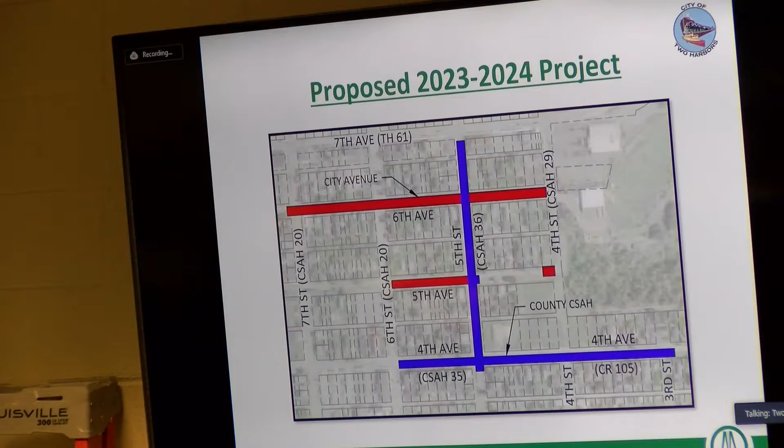As I mentioned, we've done a preliminary investigation so far. We've identified the proposed work and worked out how we're going to approach it. We haven't dotted every I and crossed every T yet—there's still a lot of work to be done in final design. But if the project proceeds, final design will be done this fall, and construction would be targeted to begin roughly late May or early June of next year.

Before we get to that point, we'd have additional public meetings. Tonight is to talk about what we're going to do, what it's going to cost, and the estimated assessments. Before construction starts, we'd have a more dedicated meeting about what you're going to see during construction—how your mail will be handled, how you can access the streets, whether your water will be shut off, and whether your sewer will be interrupted. So we'd invite you back again in the spring before work starts to go over all of that information.

One other important thing to note right now: the city of Two Harbors is not committed to this project at this point. All they've committed to is the preliminary design and the feasibility report that's been prepared. So if they feel it's not financially feasible, or not feasible for any other reason, or they just don't want to do it, they can pull the plug after tonight's public hearing and the project stops.

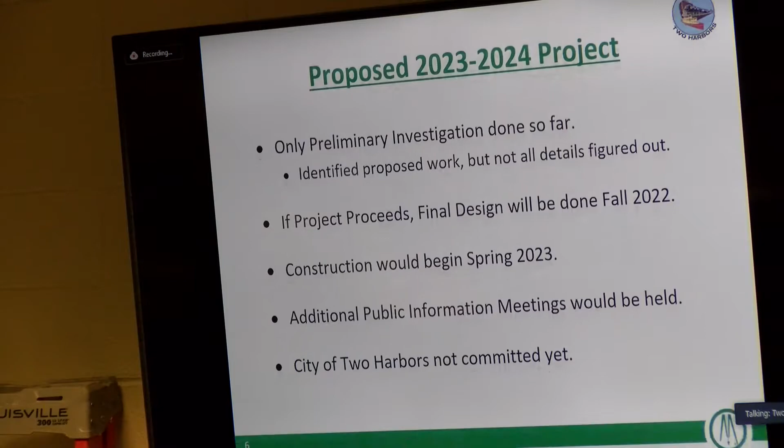Okay, so the feasibility report—as I mentioned, we have a report. This is a copy of last year's report; I don't have the new ones bound yet, so I'm just using this one as an example. The new one is very similar, about 120 pages long, and about half of that is figures, costs, tables, and that kind of stuff. But what it defines is the existing conditions out there now, the proposed improvements we want to do, what it's going to cost, and how we're going to finance those costs.

The City Council officially ordered the report, which is required by state law, on April 25th, and they officially accepted the report on September 12th. When they accepted the report, that's when they told the city clerk to schedule the public hearing, place the advertisement in the newspaper, and make the mailing to the project area.

Copies of this report will be available on the city's website, along with the presentation from tonight's meeting, once we get done with the meeting—we can get it posted probably within the next week or so. They'll also be available here in hard copy at City Hall if anybody wants to come in and look at the information.

So, proposed improvements—we won't spend a lot of time on this, but this just shows what's under a typical city street. You usually have sanitary sewer, which takes the wastewater from things like sinks, toilets, and laundry tubs, collects that, and routes it to the sanitary sewer treatment facility before it gets treated and discharged to Lake Superior. You also usually have a storm sewer, a separate sewer that handles surface water—from rain or water running down the street—goes into catch basins usually located on the edges of the street, collects that water, routes it through a separate sewer, and that usually gets routed to the lake as well.

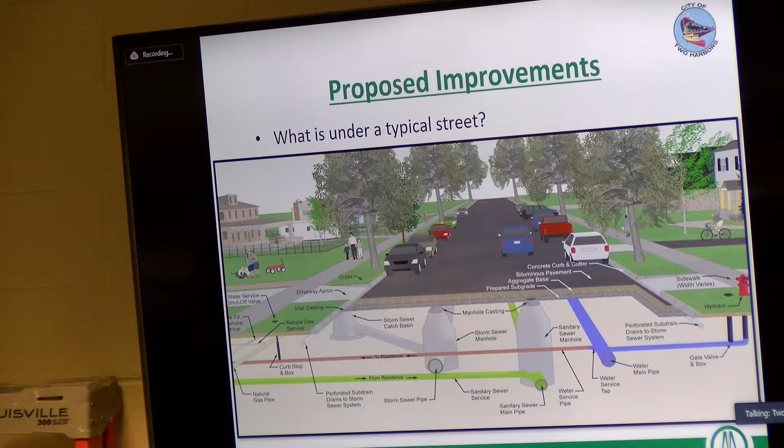So we'll run through this quickly, step by step, of what we're planning to do. For the water system, we would propose to completely replace all of the water lines under the streets now. We'd also replace all of the individual service lines from the main out to and including the shutoffs. So you'd get new mains, new individual service lines out to the shutoffs, and a new shutoff. Then on the back side of the shutoff, we reconnect it to the service line that extends up into the house.

In order to do that, we'd have to set up a temporary water system, because it's going to take probably a month for each block to remove the old water main, get the new water main in, and make sure it's pressure tested. In the meantime, we'd set up a temporary water system to make sure everyone stays in water service while we're building the new system. So it's kind of a 2-step process: set the temporary system up so we can take the old one out of service, build the new system, get it tested, and then switch over so you're on the new system.

For sanitary sewer, we'd propose to completely replace all of the mains and manholes as well. We'd also replace the individual service lines that run from the main up to the houses. We wouldn't go all the way to the house, only about as far as the water services, because a lot of times they're side by side serving the house—the water service and the sewer service. So if we go out to where the property line is, about 30 or 35 feet, and replace that water line and water service, we'll replace the sewer service out to that same location.

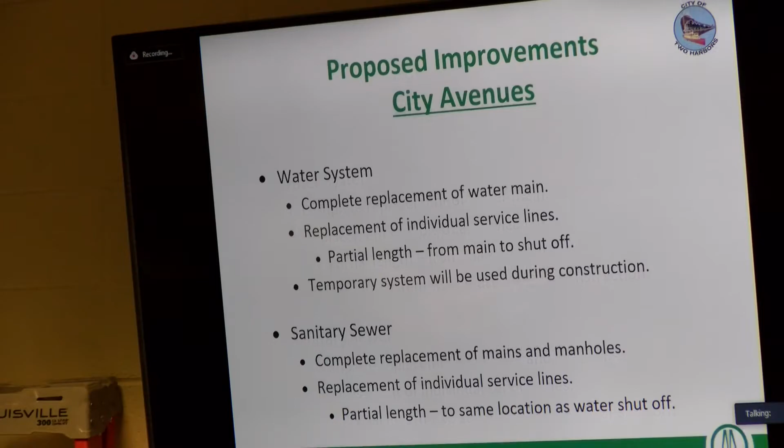Storm sewer—there's not that much in this neighborhood, but what is there will need to be replaced so it fits the new street. If we're adjusting the street width a little bit or adjusting the elevations, we've got to make sure the new storm sewer can fit that.

We also, in order to protect the investment we're making in the streets, will install drain tiles—subsurface drain lines that collect any groundwater and make sure we get it drained away from our streets, because water is one of the natural enemies of streets and will destroy a street if you let it undermine it over time. So we'll set up drain tiles wherever we can physically make them work with the grades, and install that as part of the project.

For sidewalks, we would completely replace all the sidewalks that are out there now, so you'd get brand new sidewalks running parallel to all the avenues.

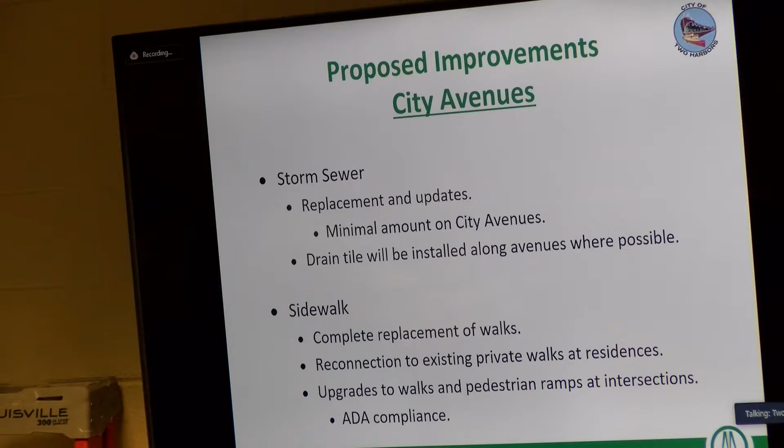Sometimes there's some steps too that we may have to replace, but all of that would be worked into the final design, and all that's estimated right now and projected in our feasibility report.

And then the street itself, we would completely reconstruct. Obviously, those sewers and waters are usually about 8 to 10 feet deep, so we're going to have the whole street dug up to a depth of about 8 or 10 feet. So when we build that back up, once we get the utilities done, we'll rebuild the whole structural section of the street. The street has strength to it, it has structure. It usually has pavement on top, a gravel layer in the middle, a sand layer down below, and below that sand layer you have a fabric to keep the soils down below separated from your engineered materials for the street.

So we would completely rebuild that whole structural section to make sure the streets have brand new 100% strength when we're done. As far as the particulars, Fifth Avenue exists right now at 32 feet wide from curb to curb, and we would propose to rebuild it at that same width. That will match the blocks of Fifth Avenue that we did in last year's project, so we'll be consistent with the width of Fifth Avenue in this project.

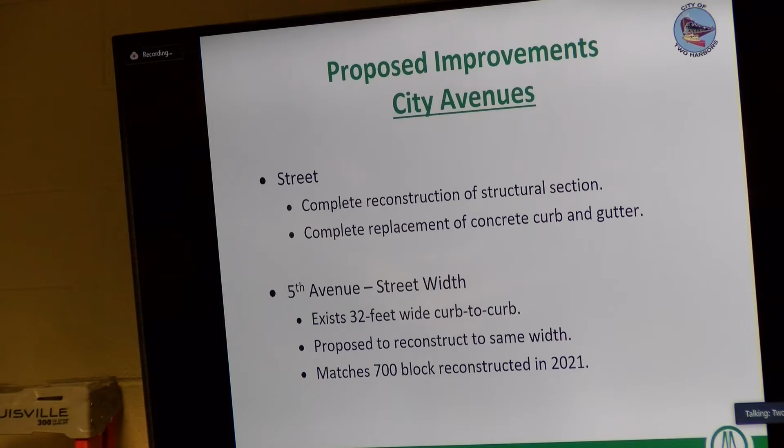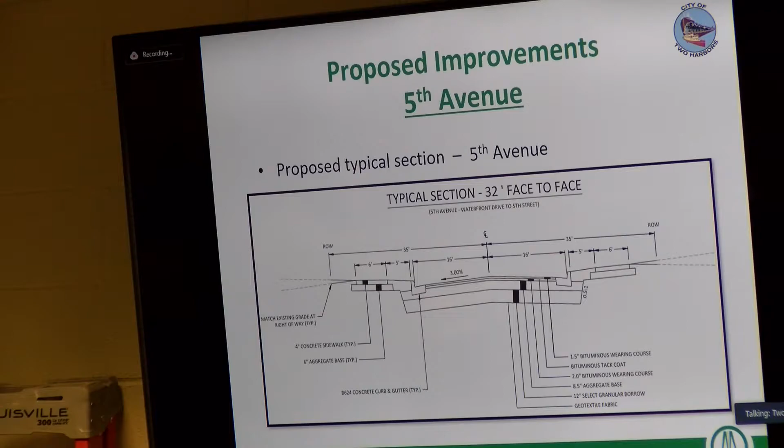This is what an engineer calls a cross-section, as if we took a knife and sliced through the street so you can see it from the end. You can't read this here, it's too small on my screen, but it typically shows that we're building the street 16 feet out from the center line each way, so 32 feet total. We'd have sidewalks on each side. Typical sidewalk width along Fifth Avenue is 6 feet wide, and there'd be a grass boulevard of about 5 feet between the curb and the sidewalk for this block of Fifth Avenue.

This figure shows that one little red dot I mentioned at the very east end of Fifth Avenue, where we want to replace that hydrant, or add a hydrant that doesn't exist currently. This just shows the limits of the work we do there.

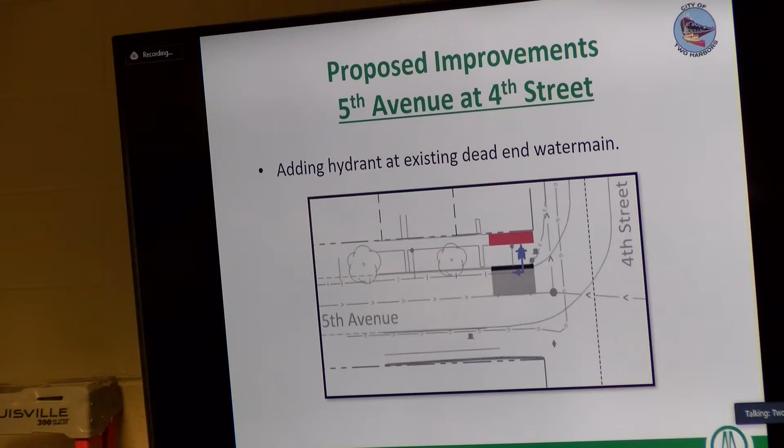And 6th Avenue, a little bit of information on that. The existing 6th Avenue, because we've got these 3 blocks - the 400 block, the 500 block, and the 600 block - each one is a little bit different width right now. The 600 block has curbs, then in the 500 and 400 blocks they don't have curbs, so the edges and the width vary a little bit. So we would propose that all of those blocks be standardized and built at 28 feet from curb to curb, with curb on both sides. That'll match the 2 blocks we just did in last year's project, so when we get done, from 4th Street all the way to the west end, it would be consistent with 6th Avenue all the way down.

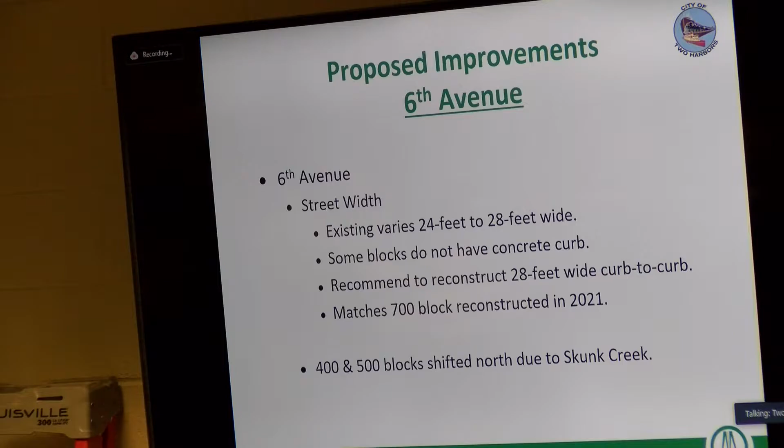For the 400 and 500 blocks, that's where the creek runs under the tunnel on the west side of town, down the alley. Then it shifts, and when you get to the segment from 6th Street down to 4th Street, it runs right along the south side of the road. Because of that, we would shift those 2 blocks of 6th Avenue north 5 feet to give a little more buffer space next to the creek. But if you go out there and look at it now, the existing road already shifts - when you come from west to east and cross 6th Street, 6th Avenue does shift a little bit north. So we're essentially maintaining that shift that's there now, but we formalize it with our design, primarily due to Skunk Creek.

Then we get to the 400 and 500 blocks. Here we're showing the road shifting 5 feet north to give more clearance to Skunk Creek, and we're only showing sidewalk on the north side, since that's where the homes are and where the majority of walkers will be. There would not be a sidewalk on the south side of 6th Avenue for those two blocks - just the road and a curb, sloping down into the creek. But there would be a sidewalk on the north side, with a grass boulevard between the curb and the sidewalk.

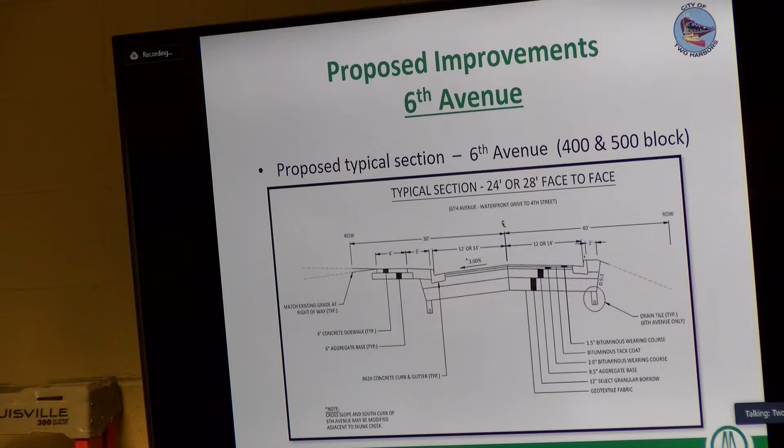That covers the basic improvements we want to do for 5th Avenue and 6th Avenue. We did look at a couple of options identified during our preliminary layouts. One is that there is currently no water main on 4th Street. The water main that comes on 6th Avenue just dead ends with a hydrant, and the water main on 5th Avenue dead ends with no hydrant.

So we talked about putting a water main north-south on 4th Street and tying 5th Avenue into 6th Avenue. The alley behind the credit union has a water main, so we could connect into that and make it all looped. Which is fine, we can physically do it, but it's not the cheapest improvement to do.

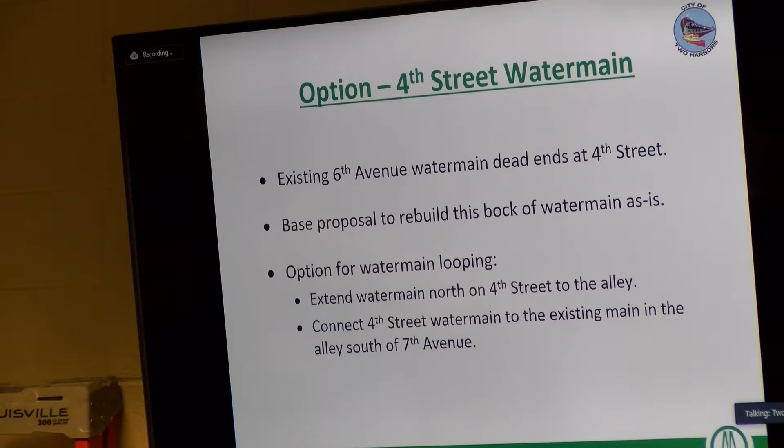In talking with the county, they're looking at maybe rebuilding 4th Street at some point, maybe 5 to 10 years out. So we concluded it makes more sense to do that water main when the county rebuilds 4th Street, as part of a larger overall project rather than fixing this one issue now. It'll be more cost effective and coordinated done in the future. So that's in the report because we identified it, but we're recommending to the council that we not add it to the project now. This figure shows how we would have done it if we'd kept it in the project.

One other option at the same location on 4th Street: there's the signal up at Highway 61, and the credit union on the west side, with a nice sidewalk coming down that west boulevard. It crosses the alley to the driveway of their parking lot, and then it just stops, leaving about 100 feet down to 6th Avenue with no sidewalk. When we rebuild 6th Avenue, we'll bring sidewalk all the way down to 4th Street, so that gap of 100 feet really sticks out.

So we looked at that, and it would be pretty easy to do since it's just a surface improvement - we don't have to dig up a lot to add a sidewalk. That can be done cost effectively. Even better for the city, since 4th Street is a county road, the county says they would probably be able to pay for the installation of that sidewalk. So we can identify it, have it done as part of the project, and the county would fund that segment if they're agreeable, which so far they've indicated they would be.

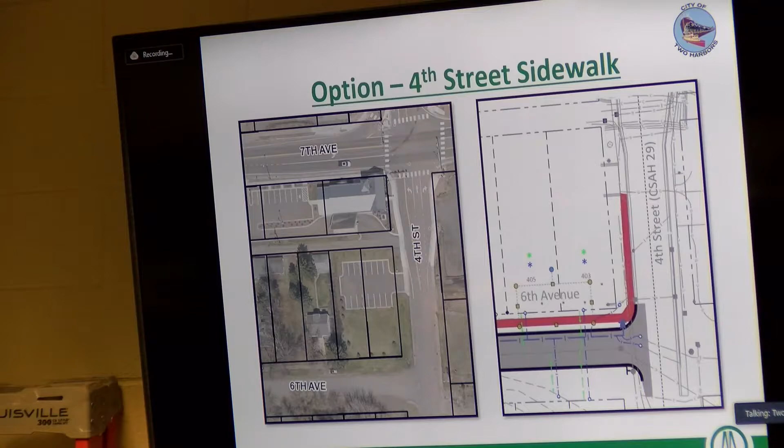Okay, so that's kind of an overview of everything the city's looked at on their blocks, the 4 blocks that are in the city's portion of the project. There's also 6 blocks in the county's portion, right? The 3 blocks on 5th Street and the 3 blocks on 4th Avenue. So here's an overview of what the county's going to do, and we have this documented in our report too, because we want to look at the whole project as an integrated whole.

So a couple of the highlights: there's a big box culvert on 6th Avenue that crosses under 5th Street. Skunk Creek is an open channel coming down the south side of 6th Avenue, and then it goes through essentially a tunnel, a box culvert. That's what it's called, a box culvert. So the county would replace their box culvert that exists under 5th Street, and they would pay for that 100%.

5th Street is their roadway. They'd also replace the storm sewer that goes from that big box culvert up to Highway 61. And then they would also extend new storm sewer from that box culvert all the way down to 4th Avenue, and they would put in new collection points at each of the intersections to help the water drain better. They also would drain tile their roadways too, to be consistent with the way we're drain tiling our roadways.

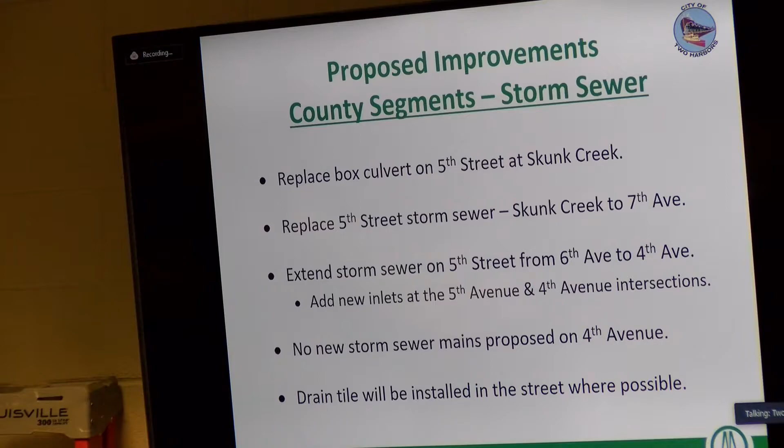Then as far as sidewalks on the county segments, right now sidewalk exists on both sides of 5th Street and both sides of 4th Avenue, and they would continue to have that in the proposed improvements. 5th Street would be a 6-foot sidewalk running north-south on both sides, immediately behind the back of curb. On 4th Avenue, they would have it on both sides, a 5-foot wide sidewalk, with a grass boulevard between the sidewalk and the curb.

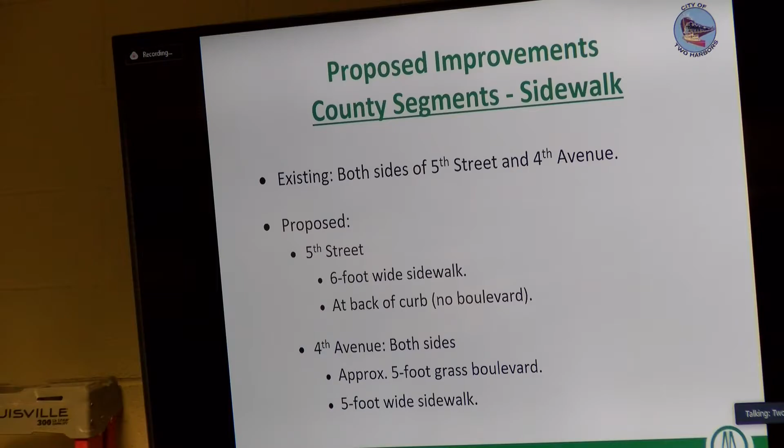I know this is a lot of information we're throwing at you, but I want to make sure again that you have as much information as possible. And it is all in the slides, so you can refer to those later at your leisure.

As far as the width of the streets themselves for the county, 5th Street would be designated to be 32 feet wide from curb to curb, with parking allowed on one side, the west side for southbound traffic. 4th Avenue would be 32 feet wide again, with one parking lane on the south side, for the eastbound traffic. That's the side where the library is, on the corner of 4th Avenue and 6th Street, so the parking would be on the library side, south side of 4th Avenue.

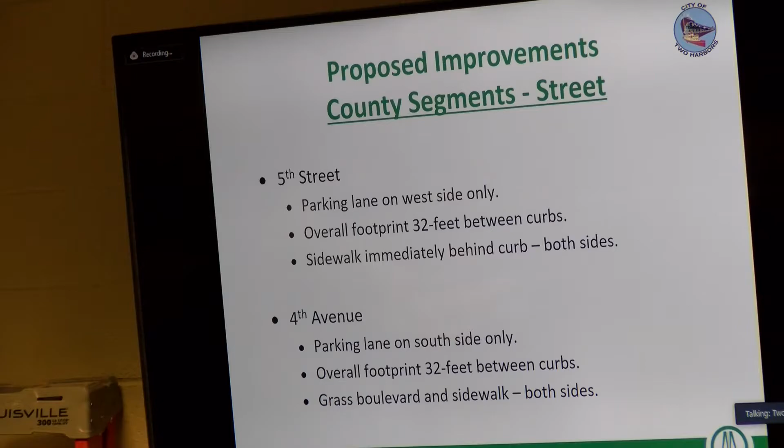So here's a couple of representations of how it would look. Fifth Street, you can see that car over on the far left, that's the parking lane, which would be coming southbound. And then there'd be one lane of traffic for each direction of traffic, and there'd be a sidewalk on both sides right behind the curbs.

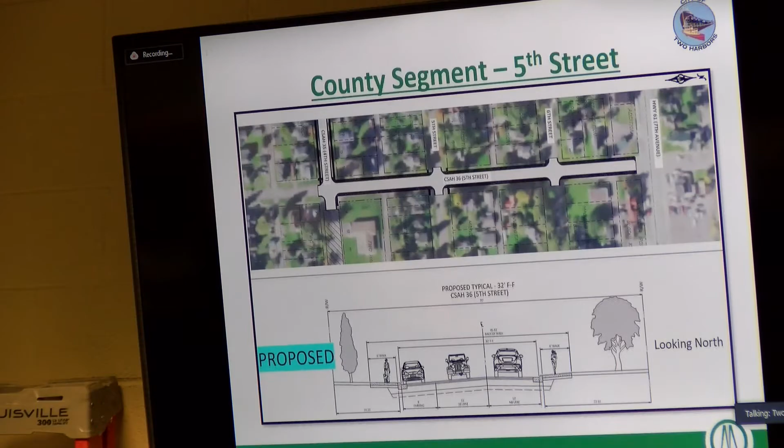4th Avenue, this is also County Road. You can see the picture there on the bottom. We're looking east in the picture, so the car on the right-hand side is parked against the curb, so the parking is on the south side of the road. Then there'd be one lane of traffic for travel in each direction. Sidewalks on both sides with a boulevard between the curb and the sidewalk.

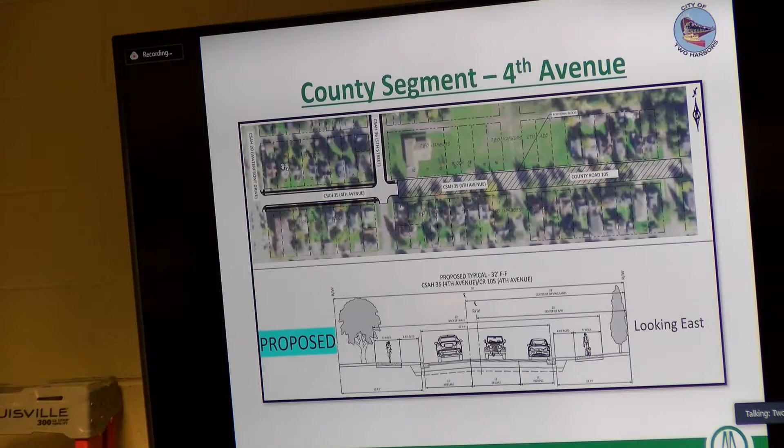Driveways - obviously there's a number of driveways that would intersect our project between the 10 blocks that we're doing. Any driveways that are there would be repaired. The material we'd match what's there now - if you have a concrete driveway, we put back concrete; if you have blacktop, we put back blacktop; if you have gravel, we put back gravel. The width would match what's there now. As far as how far back we go in your driveway, it would depend on how far we need to go to make sure we've got a good, nice, smooth transitional slope. If we lower the road 6 inches or 12 inches, we want to make sure that we feather that back far enough in the driveway so that it's not an abrupt change for you pulling in and out of your driveway. We want to make sure that we have a good, nice slope.

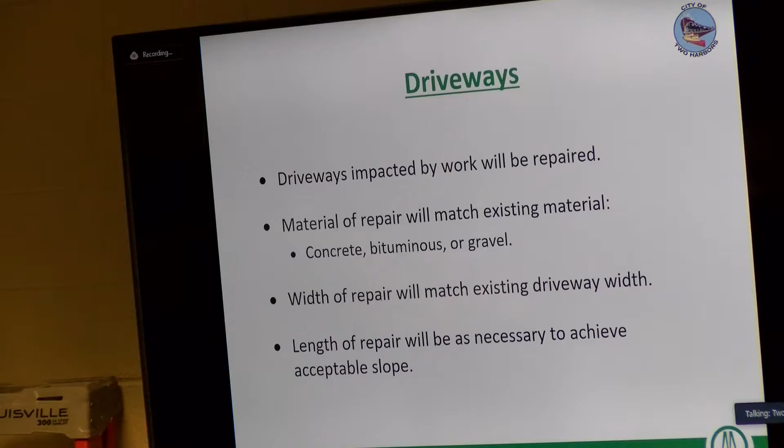Trees is another issue that we document and that we get a lot of questions on. So the approach is to try to preserve the trees as much as possible, but the honest truth is they will be impacted by the project and a majority of them will need to be removed.

There's a lot of factors that go into this, especially when we're doing the underground utilities, because those utilities being so deep, in order to have safe trenches for the workers, those trenches have to be so wide, especially those little individual service lines going up to the houses. Usually there's trees planted near where those services are coming in, and they just won't physically survive the trenches we have to dig to do the utility installations.

So we have to consider the long-term health of the tree. Will it even survive the impact that it's going under? We have to make sure it's going to be safe afterward. We don't want to damage a tree and then leave it in place, having it potentially blow down in a windstorm and cause property damage or injure somebody walking by. We also have to consider where our utilities are located. So all of that gets rolled together.

We do put out specific individual figures that show all of the trees and mark which ones we're projecting we'll have to remove. We review that with the Trees and Trails Committee. We're on the agenda a week from Thursday to review that with them, and then we'll go out in the field and actually walk it with the chair of Trees and Trails along with the forester, and review those tree removals, answering any questions and getting input from them as necessary.

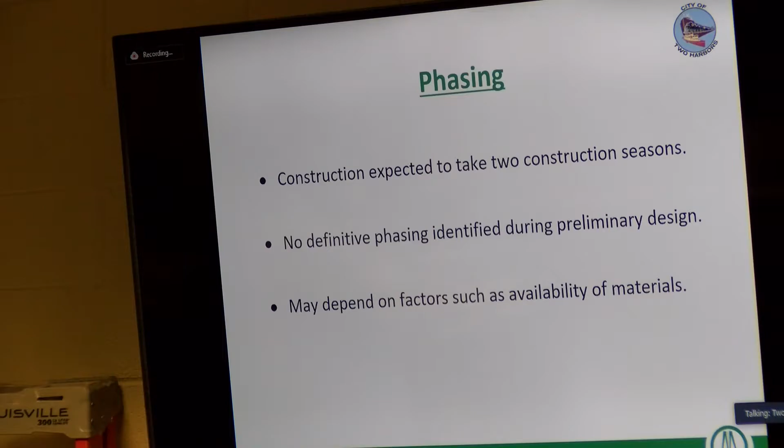We covered most of this already. All right, so now we'll get into the numbers.

So, estimated costs. We have an appendix in the report, Appendix B. Appendix A is all the maps, Appendix B is all the costs. So we have cost estimates broken down street by street, and for each street we have like 40 or 50 line items that we break it down into. We try to estimate how much gravel we're going to need, how much blacktop, how much concrete, and then how much that's going to cost per foot, building as accurate cost estimates as we can right now.

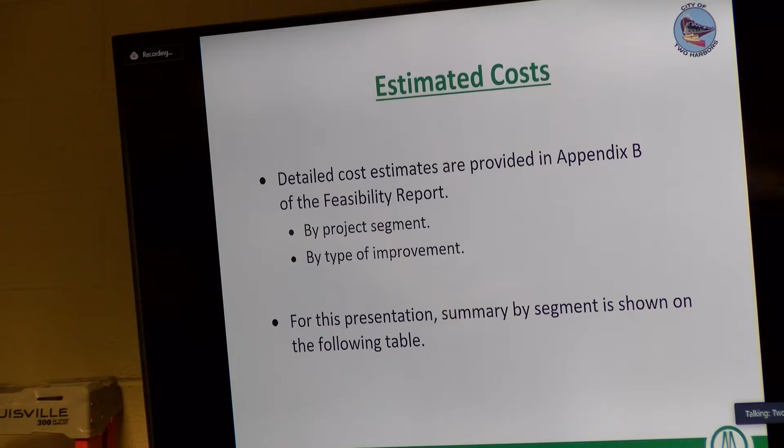So they're broken down in the appendix by each block, and then by type—water main, sewer, street, sidewalk. You can review all the information in detail if you want, but here I'm just going to show summary totals for the project. So here we've got a table—this is on slide 31, if you want to look on your slides.

On 5th Street, the county handles the street and sidewalk since that's their roadway, but the city is responsible for the sewer and water underneath the roadway. We've got an estimated cost of about $415,000 for 5th Street, and that's just utilities.

4th Avenue is also a county road, so the county handles the road and sidewalk. We have to handle the sewer and water, and that's 3 blocks long, estimated at about $1,320,000 for those utilities. Then we get into the 4 blocks of city street. 5th Avenue from 6th Street, Waterfront Drive, to 5th Street, that 1 block would be about $1,150,000, covering utilities, streets, and sidewalks.

The 3 blocks of 6th Avenue all range from about $1 million to $1.3 million. So the total of all the work the city would do, everything the city's responsible for, totals up to about $6,587,000.

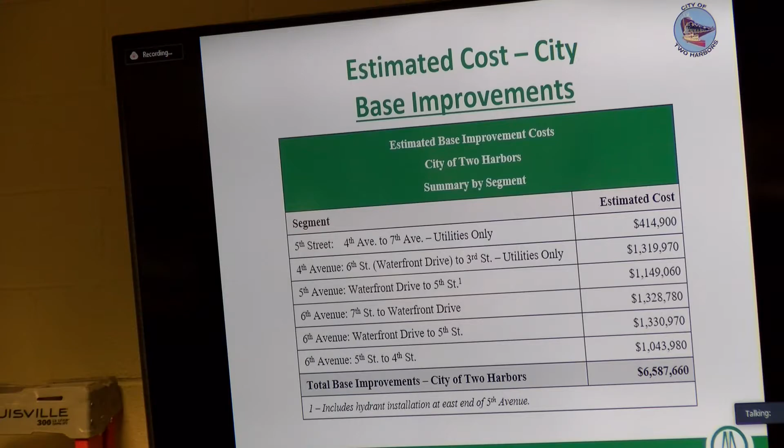We did look at those options like we mentioned. Widening out 6th Avenue to get it consistently to 28 feet would add about $62,000 to the project. We're recommending that be in the project if the council wants to move forward. The 4th Street water main looping, that little piece of water main going from 6th Avenue to loop the water main, would cost $197,000. We don't feel that's justified for that cost. We feel we can do it more cost effectively when the county reconstructs 4th Street at some point in the future, so that option we're recommending the council not include if they choose to move forward.

And then finally, 4th Street, that 100 feet of sidewalk we identified, is estimated at less than $10,000, so that seems like a pretty cost-effective solution. We'd recommend that get included in the project if the council wants to move forward, and we expect that sidewalk will be funded by Lake County.

Excuse me just a second. I'm a long-winded engineer. Okay.

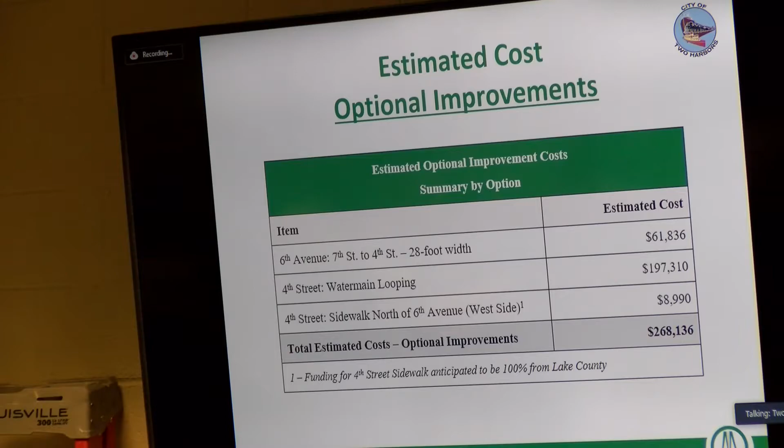So, cost for the county. The county is doing essentially 6 blocks. 3 of the blocks are on 5th Street, from 4th Avenue to 6th to 7th Avenue, with a total estimated cost right now of $2,628,000. 4th Avenue has 3 blocks, but we split it into 2 parts because of the designations, since counties function a little differently than the city does.

The county gets some money from MnDOT called state aid money, so they're able to designate some of their roads as state aid roads - County State Aid Highway, or CSAH. You'll see that acronym in the presentation. It means it's a road the county has designated as eligible to get money from the state for construction, maintenance, and so on. So 4th Avenue from 6th Street over to 4th Street is a CSAH. From 4th Street to 3rd Street, it's not - it's just a regular county road, funded locally by the county through its local option sales tax or property levies. That's why we have to separate that block out, because it's a different funding source for the county than the CSAH roads, so it's got its own estimate.

So long story short, the 6 blocks that the county has, estimated total cost is about $4.5 million. When you put that together, you've got the city's part at about $6,587,000, those optional improvements we looked at, and the county's part of the project, coming up with a grand total of the overall project of about $11.4 million, which is a very large project for Two Harbors - which is why we're taking the time to go over it in as much detail as we are tonight, because it's an important project for both the city and the county.

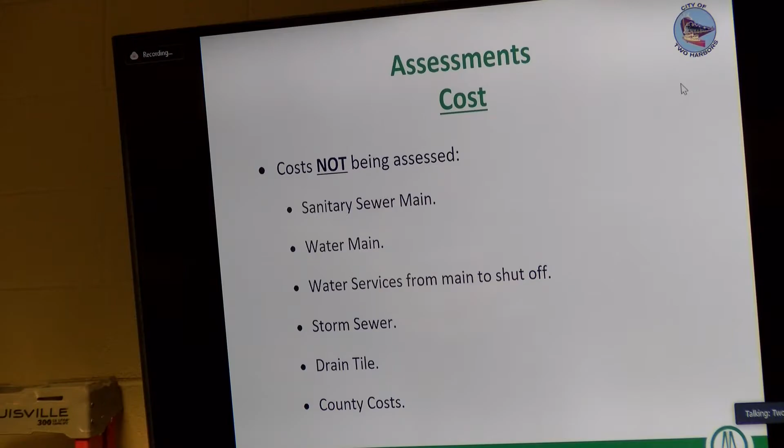As far as what we do assess, the city's policy for streets is the city pays half and the properties pay half—we split that cost 50-50. For sidewalks, the city's existing policy for assessments is for each square of sidewalk that gets installed, $50 gets assessed to the properties.

Sanitary sewer services and water services, as I mentioned, only serve one individual house, so that house pays directly for the cost of that service line. But again, for the water service, it's only if it goes past the shutoff—there's no cost to the property owner from the main out to the shutoff.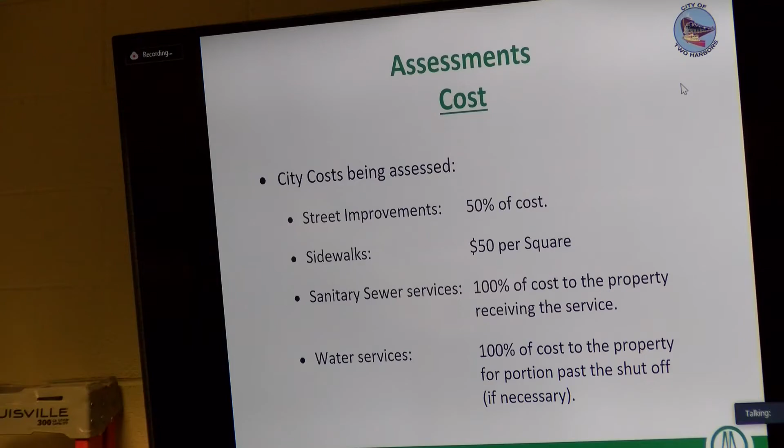So we start to talk about the assessments, the parcels that we would propose to include, or that would be eligible to be included, are those immediately adjacent to the project segments. The key for assessments is the state's law requires that we provide benefit to the properties. So whatever your property benefits in the increase, or the dollar value of benefit you get, that's the limit as to what the city can assess you for the work. If you've got an old busted up street in front of your house and we put in a brand new street, and that increases your value by $20,000, the city could assess up to that amount because in the state's eyes you've received that benefit. That's not necessarily what we charge though, but we need to make sure we stay below that amount, because otherwise you can legally challenge us.

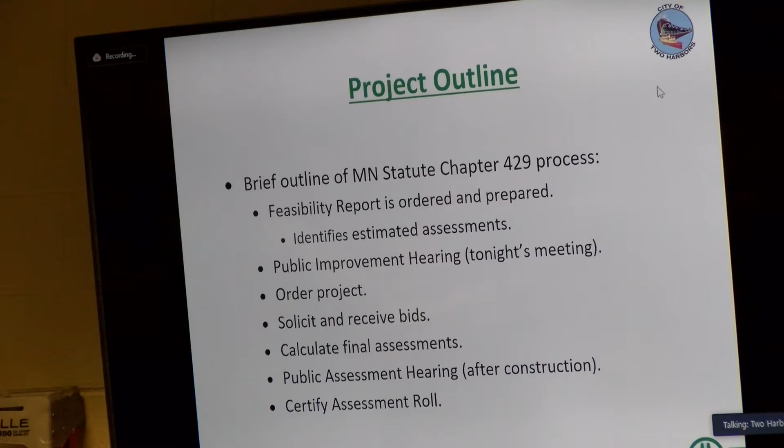Now, you have rights under the state statute as well. So you have the right, first of all, to object to the assessment and say, I don't think I'm getting the value that you say we're getting. So you have the right to do that. But just standing up at a meeting and saying that isn't going to do much, right?

The objection has to be put, for it to be valid, it has to be put in writing. And it has to be submitted to the city before they certify the assessment roll. So you don't have to do anything tonight. You've got 2 years to think about this.

It's when we have that next meeting at the end of the project, that's when you would file a written objection if you object. That initiates, that puts the city on notice that you're objecting. But that in itself doesn't do anything either.

The property owner then has to take the next step to file it at district court, and you have 30 days to do so. So if you stand up in a meeting and say, I object, and you sit back down, it'll be noted in the record, but nothing more. If you submit a written objection, that'll get noted in the record too and documented, but unless you take it farther, still nothing will happen.

So to actually challenge an assessment, the burden's on the property owner to go to the court and say, I want to file a formal challenge to the assessment. And then the city would present its case, you present your case, and we'd work out the resolution.

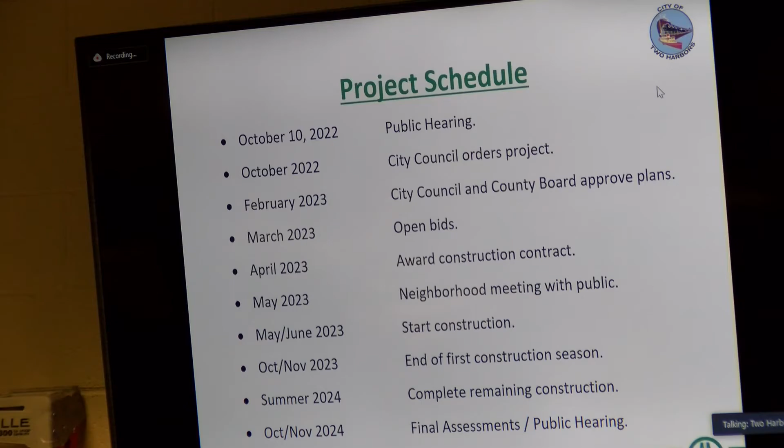When it's all done, we would come back and have another assessment hearing, a public hearing just like we're having tonight, where we'd go through the final costs, the final dollar amounts, and that's when the city council would decide whether or not to actually certify the assessment roll and assign those assessments.

So the next steps: we've met the legal requirement of the state statute by holding tonight's meeting. I'll open it up to the council for questions here in a minute. When they get done with their questions, we'll open it up to the public for your questions.

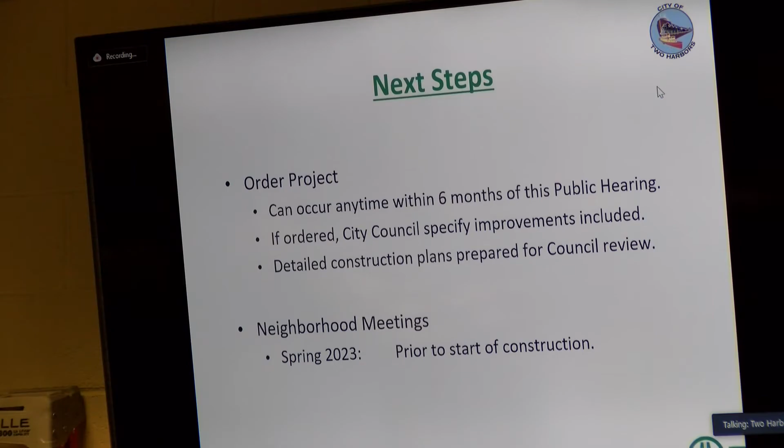The council can take anywhere up to six months to decide if they want to move forward. This public hearing we're having tonight is valid for six months. If it gets beyond six months, they'd have to hold another one. But they expect to make their decision at their next meeting, two weeks from tonight. So if you're interested, come back for that meeting. And again, we'd have a neighborhood meeting prior to the start of construction in spring of 2023 if the project moves forward. So with that, I'm finally done.

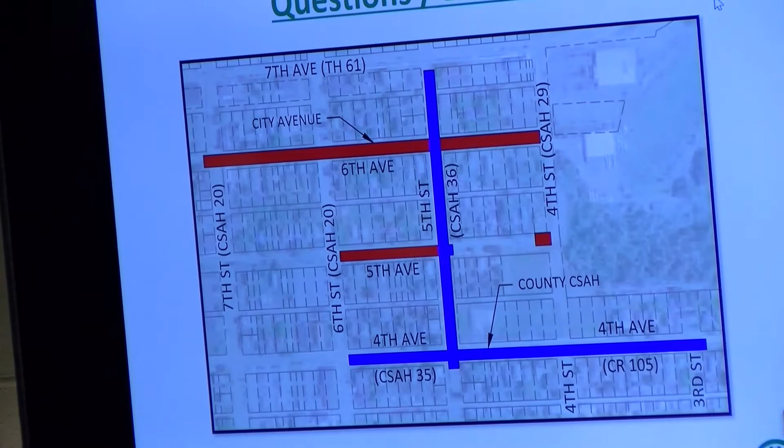Could you just clarify that one more time? Correct. Right now the county has authorized 4th Avenue between 6th Street and 5th Street. So you come down 5th Street and the left-hand side of that L at the bottom, that's already authorized by the county. It's the two blocks east of 5th Street. So the blocks between 5th and 4th, and 4th and 3rd, those are on the county board agenda for tomorrow. But staff has reviewed it and shared the numbers, and the preliminary indication they've gotten back is positive.

Okay, so if the county board tomorrow said no, we're not gonna do those two blocks, then they would be cut out of our project as well. Okay. And then my follow-up question, this may be a Miranda question too.

Obviously 15 years is a long period of time to pay those off, which could potentially be yearly assessments. If a resident were to sell their parcel, does that go with the parcel, or do they have to defease that whole amount before they sell their property? I think we've been asked this question before.

I'll take a shot at it first, Miranda, if you want. The assessment goes with the property. So if the property were to change hands, the assessment would stay with the property. Typically though, if you're a buyer looking to buy a property, you're gonna want that assessment resolved as part of your closing. It doesn't legally have to be. Legally, both parties could agree that we'll just let the assessment roll over and keep paying it. But usually it's like, no, let's clear that up as part of this transaction. Whether it's the buyer or seller that pays it off, that's the individual negotiation of that transaction. But legally, my understanding is it could roll over with the property. It very rarely does though. Usually it gets cleared up at the time of transfer. Thank you.

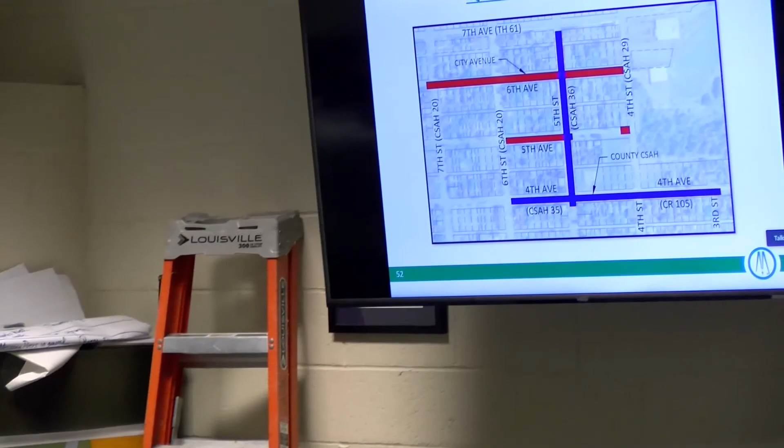For the properties, that would be me and my daughter across the street at the corner of 4th Avenue and 3rd Street, 3rd Street isn't on this. So later on, if and when that gets done, do we have to pay this again?

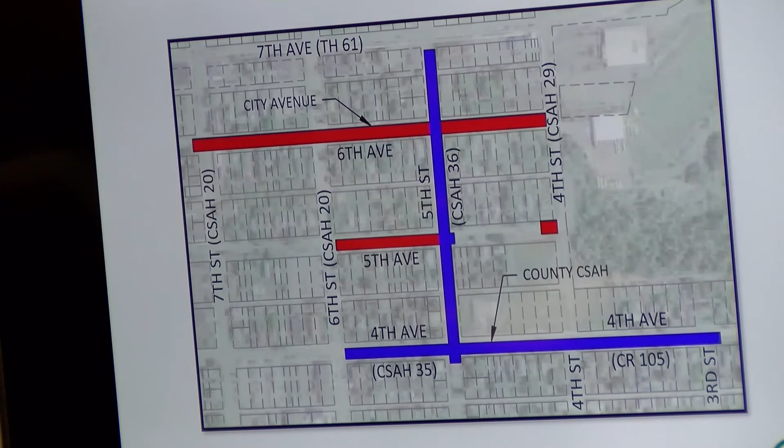The question was, if you live on the corner right now at the edge of the project, and in the future the next street gets done, would that be assessed again? The assessments are done on a project-by-project basis. The city's policy does take into account that north-south streets have less properties abutting them than east-west. The east-west avenue on a block usually has 16 properties, 8 on the side. The north-south block has only 4 properties, 2 on the side. So the city adjusts that 50% cost, if I can get back there.

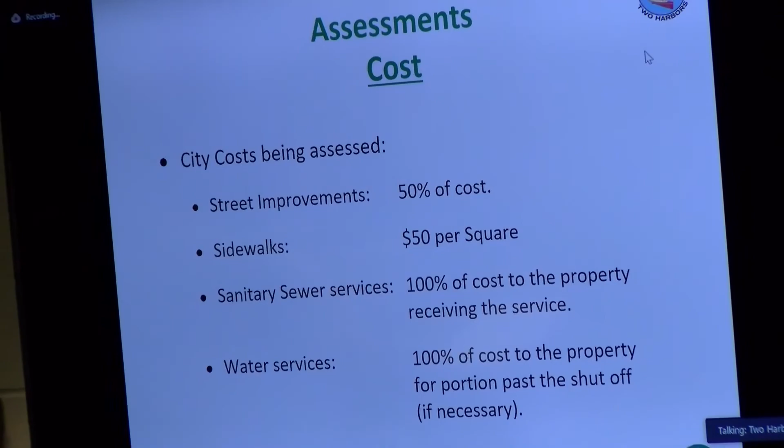That's in here somewhere, there it is. So the street that says 50% of the cost, that's for east-west streets. If we come to a north-south street, that number drops to 15%. So if your assessment was 15,000 for the east-west, it would be 5,000 in relative terms.

Will we get a letter telling us what you all have decided, like we got the letter about this meeting? Usually you have to stay tuned into the next following council meeting to see what we would decide. So the next council meeting is when you'll have decided? Correct, and that is two weeks. Two weeks, okay, thank you.

Just remember that just means we're doing a preliminary project, it doesn't mean we're going to go and do it. It means we're going to get all of the numbers together so we know exactly what it's going to cost. If it comes back astronomically high, we would probably not do the project. There's a couple of steps before we get to the part where we start construction, so if you have questions, check out the website, talk to the folks at City Hall.